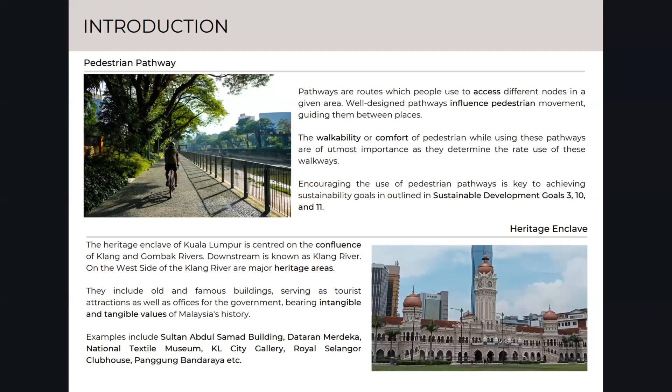These are actually quite important places because they have all these tangible and intangible values of Malaysian history. So these are quite important places in Malaysian history.

As part of the research, the problem identified is that despite there being designated paths through all these heritage enclaves, a lot of them remain unutilized, underutilized. Most of them have kind of their own subzone, their own sub-district. Each building will have its own standalone pathway, and crossing from one pathway to another isn't really convenient, and it's not very clear sometimes.

So people tend to especially avoid this part of the city, this side of the Klang River, preferring to visit the more busy sides where it's easier to navigate, like Petaling Street, Central Market, and Kasturi Walk. So during the day this site would be left a bit neglected, despite having all these historical and cultural values attached to it.

So the aim of this research is to establish the factors that define a comfortable pathway for pedestrian use within the heritage enclave, and then proposing design strategies on the existing pathways to encourage public use.

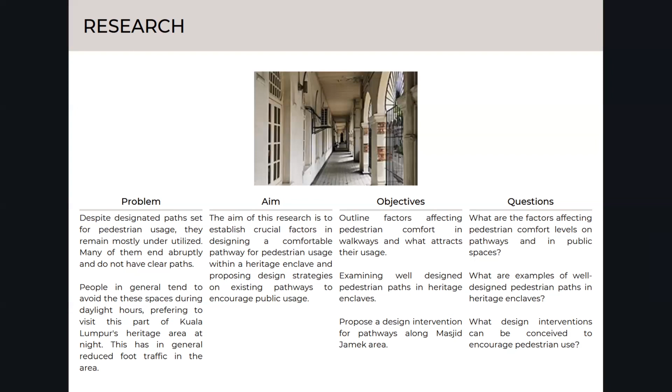The questions formulated, that act as a framework to help achieve these objectives, are: what are the factors affecting pedestrian comfort levels on pathways and in public spaces? What are examples of well-designed pedestrian paths, and what design interventions can be conceived to encourage pedestrian use?

Moving on to the literature review, the concept of heritage enclaves. Heritage is what societies, what people have left behind over the years. Generally heritage consists of tangible culture, intangible, and natural heritage. They're seen as very important parts of a town, a city, a place, a district, a zone - anything. Heritage is something important, tied to that particular place's history and identity.

The other concept is an enclave or a district - it's like a medium to large part of the urban fabric. Basically an enclave or a district, you walk in and experience it from the inside. From the outside, you pass by and may not really know what is going on, but when you walk in and start seeing particular programs and a particular design style, then you know you're in a...

historical district, let's say, or market district. Let's say you're in Petaling Street area or Central Market area - those would be market districts. You pass through Bukit Bintang, you would know that district or enclave is a business district or finance enclave sort of thing.

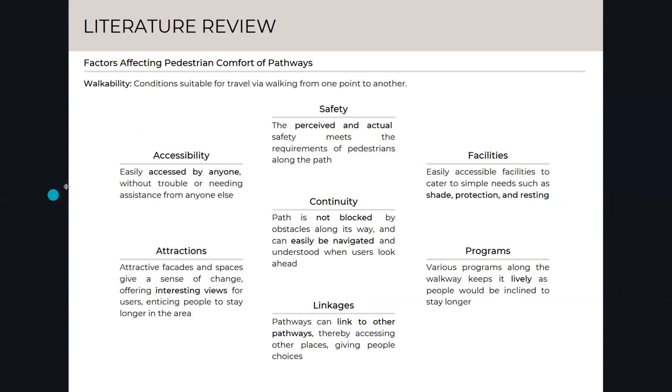A side-by-side analysis using the previously stated literature review, all these factors will be plugged into each of these case studies, and they will be compared and contrasted. Then from there, a proposed design intervention for Malaysia for the site, especially the Sultan Abdul Samad building area, National Textile Museum, and Masjid Jamek, will be proposed based on studies and analysis of the case studies.

That is all for my part. Thank you.

So the first one will be the introduction. What is a multi-level walkway? The multi-level pedestrian walkway is an effective way to enhance pedestrian connectivity to buildings and urban structure. It can easily connect pedestrians to enclosed buildings and improve city accessibility. Multi-level pedestrian walkways can bring pedestrian friendliness to the city, and as a result, the multi-level walkway was transformed into a design that may improve pedestrian friendliness without compromising automobile advantage and creating comfortable public space for social activities in a fast, busy city center.

So the next one will be the problem statement. Multi-level pedestrian walkways are exposed to environmental factors that affect thermal comfort. The problem of needing long ramps and stairs for pedestrian accessibility may increase the cost of construction, and large city planning is required to connect city node point to every advantageous place.

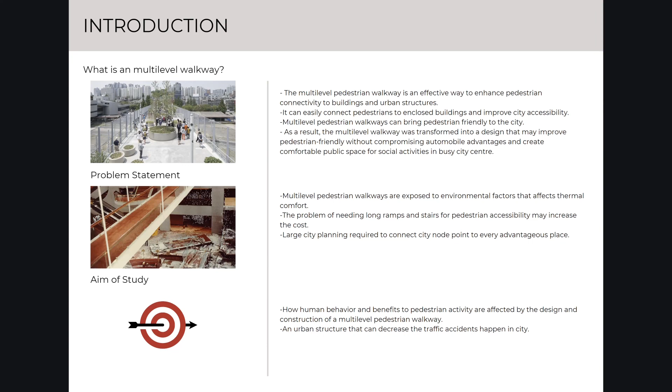The aim of this research study will be how human behavior and benefits to pedestrian activity are affected by the design and construction of a multi-level pedestrian walkway. The second aim will be urban structure that can decrease traffic accidents happening in the city.

Then the next one will be the literature review. The first subtopic will be the benefit of multi-level pedestrian walkway. Pedestrian infrastructure is essential for both development and public safety. Elevated walkways can improve the safety and health of pedestrians and other road users.

The second subtopic will be forming a lively, healthy, and sustainable city. Overdeveloped urban areas, urban design, and city planning have decreased city pedestrian walkability. The city is a concrete jungle of parked and moving cars, and as a result of municipal development, the city square, which can be utilized as a place for people to run, rest, and relax, is becoming less active.

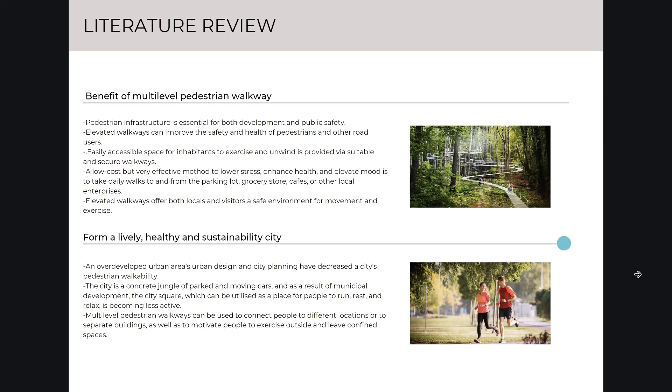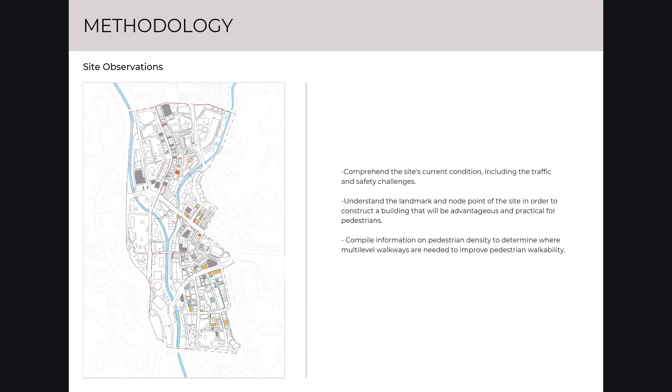So the next topic will be the methodology of site observation. Comprehend the site's current condition, including traffic and safety challenges. Then understand the landmarks and node points of the site in order to construct a building that will be advantageous and practical for pedestrians. The last one will be compile information on pedestrian density to determine where multi-level walkways are needed to improve pedestrian walkability.

Then the next will be the case study. The first case study will be the High Line in New York, on Manhattan's West Side. There's an elevated freight train line that has been converted into a public park called the High Line.

To adapt to the changing needs of the urban surrounding, the new spaces will provide greening opportunities, alternative transportation options, and social advantages.

Then the second case study will be the Skywalk system in Hong Kong. The Skywalk system has been effectively deployed in Hong Kong's residential districts, reducing the traffic-pedestrian friction associated with high density living, while helping to encourage the general public to use public transportation because they are connected into a trunk and feeder transportation network.

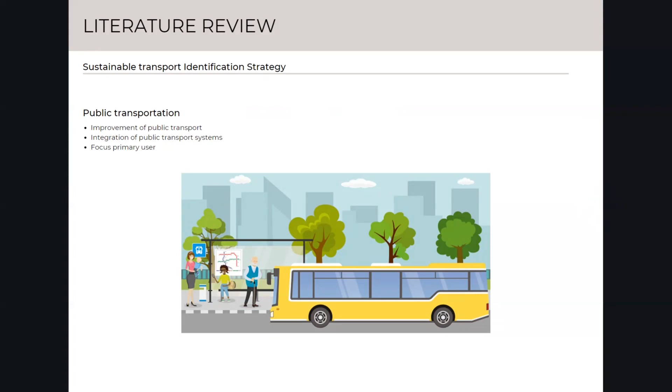So for the next one is public transportation. Mainly it is to improve the public transportation, the integration of public transportation systems, and also focus on the primary user.

So for the methodology, the case study I found out is in Chicago, USA. They mainly use low carbon mobility, using the bicycle as the main transportation throughout the city. They have built a robust network of bicycle infrastructure that is safe and comfortable for the user.

So for the next case study, Boston in USA. They generate a hexagonal tessellation of site equal to 1 mile, which is generally the distance an average person can walk from one node to another.

So the last one is the Walworth Road in London, whose strategy is a town center densely populated with people, almost all within a 10-minute walk of this Walworth Road as it junctions to another village center.

So for this site observation, on how I performed my research and analysis: first is to indicate the type of transportation issue on the site, then to understand the surroundings of the site and utilize a type of sustainable transport strategy, and lastly to mainly use good circulation of bicycle infrastructure, as bicycle infrastructure can massively decrease the air pollution rate and solve various transportation issues.

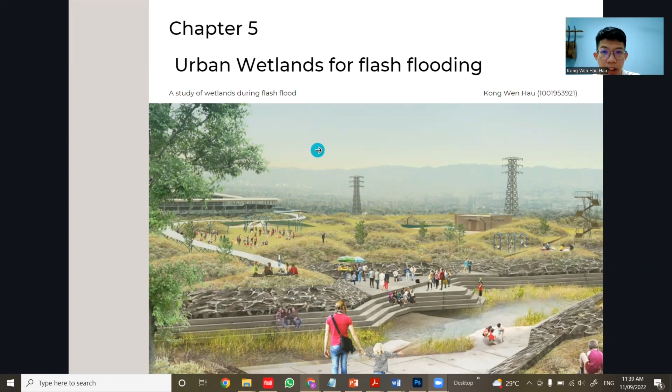So what is urban wetland? Urban wetland is a catch-all phrase encompassing water bodies such as lakes, rivers, swamps, marshes, wet grasslands, and peatlands that are continuously or seasonally saturated with water. Over the last century, two-thirds of the world's wetlands have been destroyed due to land use change and urban growth. Wetlands in Europe have dramatically dropped in quantity and quality, with many contaminated at an alarming rate.

Meanwhile, flood walls and drainage systems are commonly used to manage flood risk. Researchers believe that adding additional wetlands into the urban landscape might be successful. Urban wetlands should be designed in such a way that they account for the possibility that water running into them from the urban surroundings is more polluted than in a natural environment.

Moving on to the problem statement. Flash flooding has been a concern in Malaysia for a long time, and it has now become a critical issue. Although public and political awareness of wetland assets is growing, sectoral structure and responsibilities for wetland management are still lacking. These are the current issues we are facing, and there's no formal guideline for managing wetlands in the context of local watershed plans.

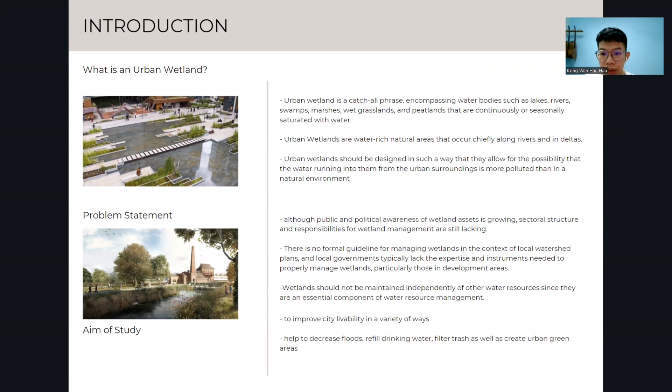Local governments typically lack the expertise and instruments needed to properly manage wetlands, particularly those in development areas. Wetlands should not be maintained independently of other water resources since they are an essential component of water resource management. The aim of this study is to improve city livability in a variety of ways, helping to decrease floods, refill drinking water, filter trash, as well as create urban green spaces.

Moving on to the literature review. The article I have chosen is Urban Wetlands: A Review on Ecological and Cultural Values. The topics covered are divided into three: natural and constructed wetlands, urban wetlands and urban sustainability, as well as urban wetlands and recreational values.

The first one is natural and constructed wetlands. Natural wetlands include rivers, lakes and their floodplains, swamps, estuaries, peatlands, tidal flats, coral reefs, and mangroves. On the other side, constructed wetlands include canals, drains, reservoirs, artificial lakes, fish and shrimp farming ponds, rice fields, and stormwater.

Urban wetlands not only provide ecological and recreational amenities in cities, but also enhance water quality through natural water filtration and climate regulation. One thing I forgot to mention is that urban wetlands are characterized as either natural or man-made.

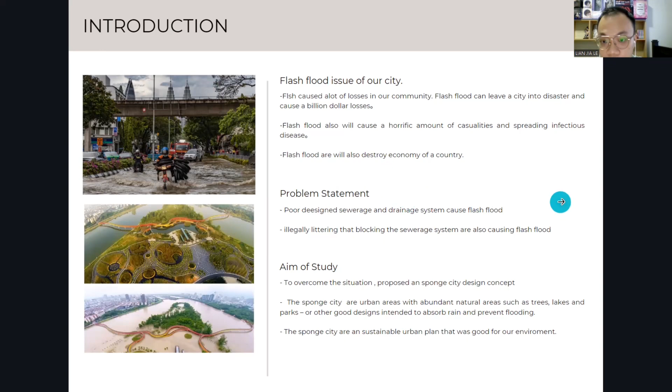Moving forward, which is the literature review. So the advantages and benefits of the sponge city are more clean water for the city because it replenishes groundwater, and thus greater accessibility to water resources for the city. This also entails greater water self-sufficiency, which allows cities to increase reliance on water sources from within their boundaries, and cleaner groundwater due to increased volume of naturally filtered stormwater.

Reduction in flood risk as the city offers more permeable spaces for the natural retention and percolation of water. Lower burden on drainage systems, water treatment plants, artificial channels, and natural streams.

They also provide a greener, healthier, and more enjoyable urban space compared to a concrete forest, which is what we're living in right now. A greener urban space can also improve our quality of life drastically compared to what we're facing now, and create a more pleasant landscape, aesthetic, and recreation areas that are enjoyable and attract people. They also can enrich biodiversity around green open spaces, wetlands, open urban gardens, and green rooftops.

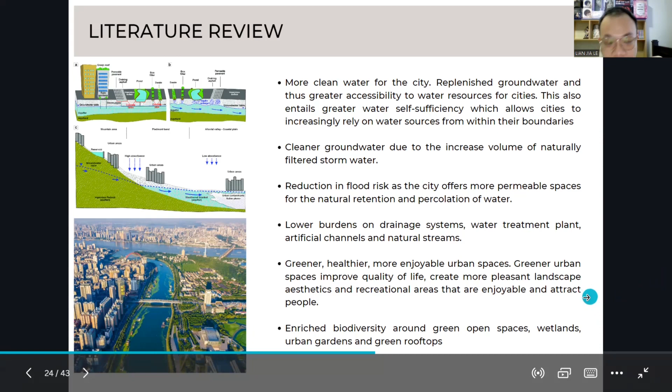So this is one of my case studies applied in China: Shenzhen Sponge City. Firstly, the concept was established by the China government. Then Qin, one of the major architects, participated in this project.

So by applying this method, China has been using a very practical and yet very aesthetic way. It's a win-win solution to solve the flash flood problem.

On smaller scales, there are also several options. Permeable pavement can be used on roadways, sidewalks, and pathways to allow water to infiltrate the ground, rather than washing off to the local stormwater system. So practicing these kinds of things is very effective in solving the flash flood problem.

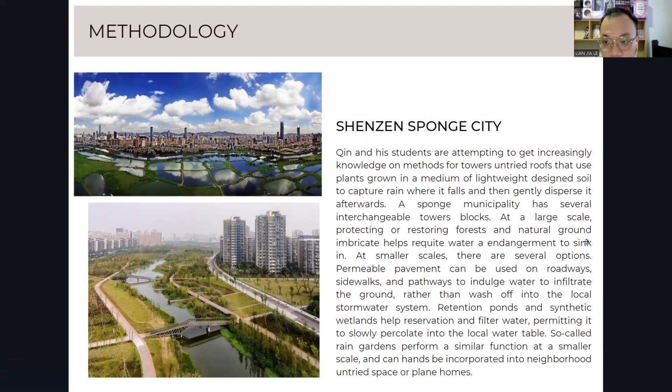The reason for the Masjid Jamek flood was mainly because the city was always developing, causing rapid growth of population, but they didn't have a proper sewerage and drainage system to cope with the current situation. That's why it led to the flood crisis. Also, the drainage and sewerage system as designed is unable to handle the volume of garbage produced by the inhabitants of Kuala Lumpur metropolis. Due to this, the constant overload of drainage during rainy periods will increase the risk of flooding.

Illegal dumping and poor waste management, which clog the drainage and sewerage system, are two more unavoidable factors contributing to flash floods. So, in short, to overcome this situation and avoid it happening again, sponge cities are a very practical way, as proven by China, which solved the flash flood problem by separating the tasks of the drainage system, not relying too much on it. This is to avoid the chances of our city getting flooded and to avoid more losses. Thank you, sir and miss. That will be all of my presentation.

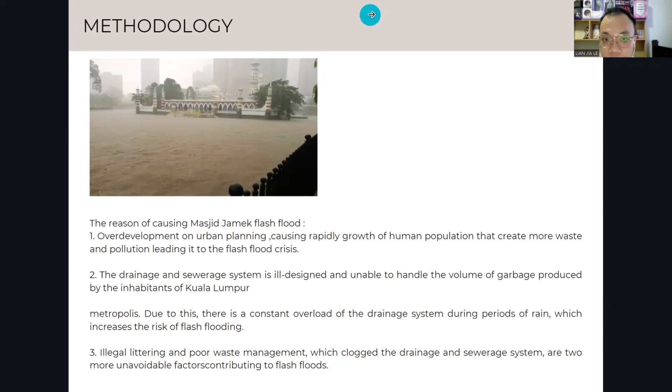Hi, Miss Intan and Professor Nangkula. My name is Vincent, and I will be presenting my part of this assignment, which is an evacuation park for people during flash flood incidents.

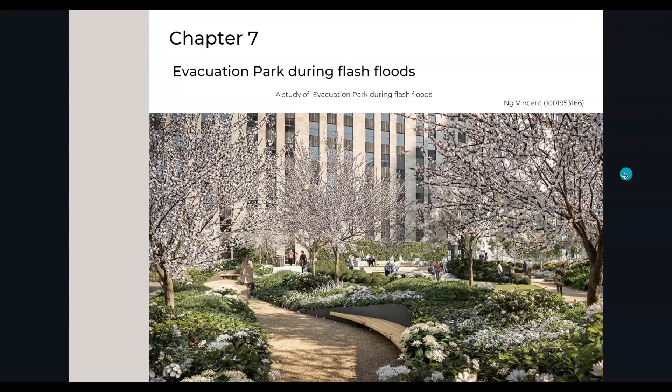Flash floods are the most frequent and disruptive hydrometeorological phenomenon that cities in Malaysia encounter. They are mostly caused by seasonal monsoon rain, which causes insufficient drainage systems to channel water flow properly. The overflow of rivers is also a major cause of flash floods in the city. Looking back at recent history, it appears the problem has gotten worse rather than better.

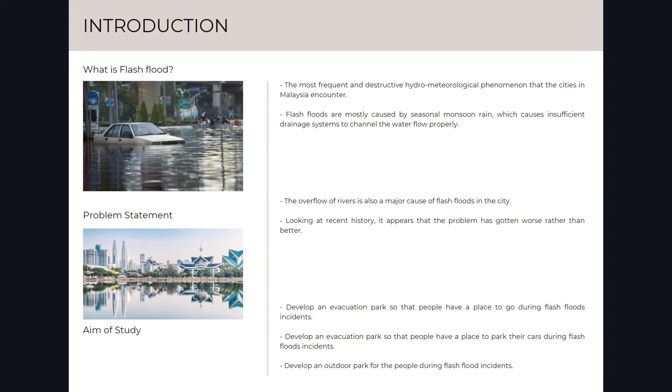The aim and objectives are to develop an evacuation park so that people have a safe place to go, a safe place to park their cars, and an outdoor park for people during flash flood incidents. The paper includes a review of the literature as well as discussions about the built environment, flooding, disaster risk management, and resiliency and sustainability theory.

The goal of this paper is to review relevant literature on reducing the impacts of flooding on the built environment in Malaysia, while also describing potential improvements and current measures to deal with the aftermath of flooding. The paper is important in three ways: reducing flood impacts by raising knowledge, providing responsibility measures in flood reduction from various perspectives, and planning ways to mitigate the effects of future flooding threats.

In conclusion, the key findings of the paper are that through knowledge application, the practice of reducing flooding impacts could be improved. Flooding management should be carried out earlier before flooding occurs, but also later during the event, and disaster management should be carried out later in the event. Management plans must be prepared to deal with any uncertainties that may arise.

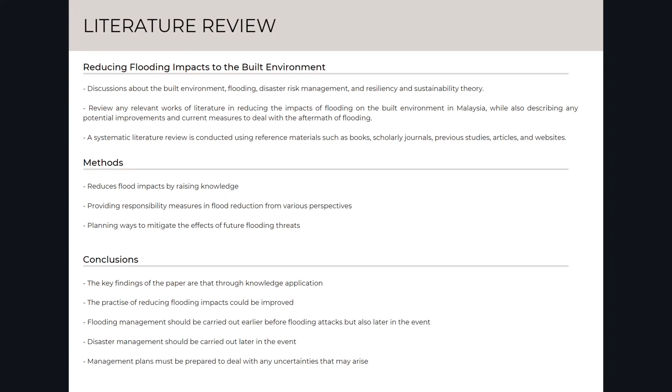The first case study would be the Melbourne Skyfarm. It features a program to provide some demands to the people around the site. The next case study would be the Tishman Speyer's Rooftop Park. It features dense landscaping throughout, meandering pathways, pavilions, seating, and some passive recreation areas.

The last case study would be Japan's Namba Parks. It features an 8-level rooftop garden and will act as an evacuation shelter for people. That's all for my part. Thank you for listening.

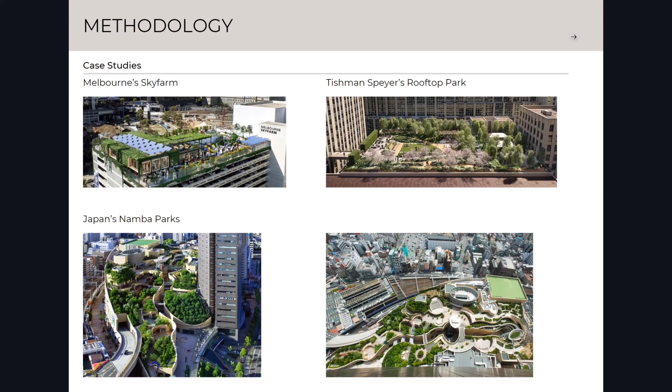Hi, good morning, Miss Intan and Professor Nangkula. My name is Chen Wei Kin, and today I would like to talk about my chapter, Biophilic Architecture for Urban Heat Island Effect. It's the study of biophilia in an urban setting.

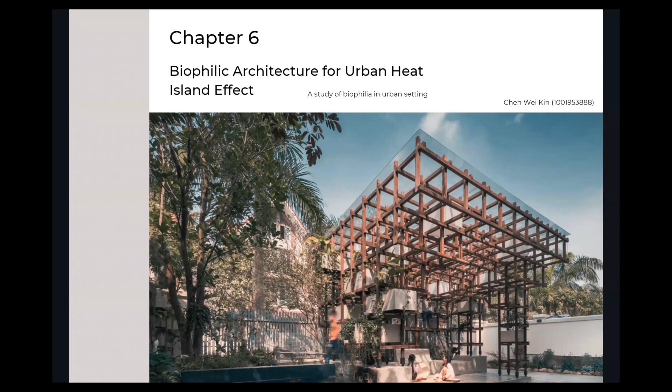What is biophilia? Biophilia is understood as the love of life from ancient Greek mythology, where it was first introduced as an expertise in social psychology by a psychologist named Erich Fromm, who states the idea of biophilia is understood as love of life from ancient Greek.

The hypothesis suggests that humans possess an innate tendency to seek connection with nature and other forms of life, such as our natural surroundings and environment, where design takes place to attract humans towards the beauty of nature and greenery as part of an architectural solution strategy in everyday life. It is the belief of creating spaces consisting of natural materials such as plants, stones, and water, where the natural shape of organic formation also brings psychological comfort and emotional benefit to users as it releases serotonin, a psychological hormone.

The problem statement is that the urban heat island effect is currently facing Kuala Lumpur, which is our site in Unit C, as the urban heat island effect is defined as the temperature of the city getting higher than usual, and also higher than the rural regions of the country.

These problems are actually caused by pavement structure, buildings, and elements that absorb and recollect heat and emit heat radiation, where materials such as concrete, asphalt, and tar are involved.

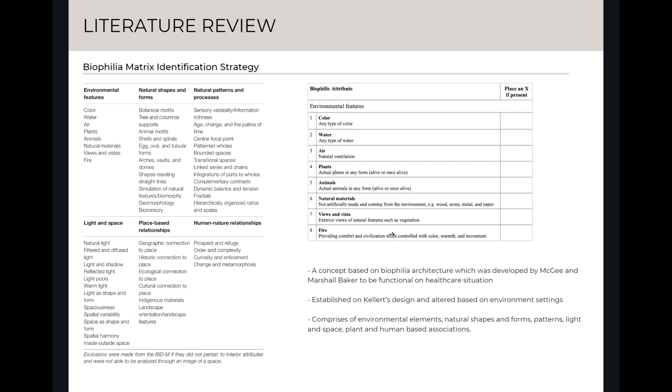Vertical greenery system is defined as the greenery incorporated into building facades in urban development, such as wall, roof, and balcony. It's used to integrate with buildings to lower the temperature of the exterior surroundings and cool the interior spaces of the building. It has a cooling effect as a vertical greenery wall system.

It's beneficial in terms of decreasing consumed energy, where vertical greenery wall systems are possible to signify ecological engineering technology, known as reconciliation ecology, where low temperature and great humidity attributes were discovered between the wall structure and green facade. This means green facade can decrease the mean radiant temperature values by having 50% green coverage and a shading coefficient of 0.041 to reduce the transfer of thermal heat value on the glass surface of the building.

So there are also potential advantages of vertical greenery systems in tropical climate countries such as Malaysia, and this can also reduce the consumption of energy in terms of cooling the building.

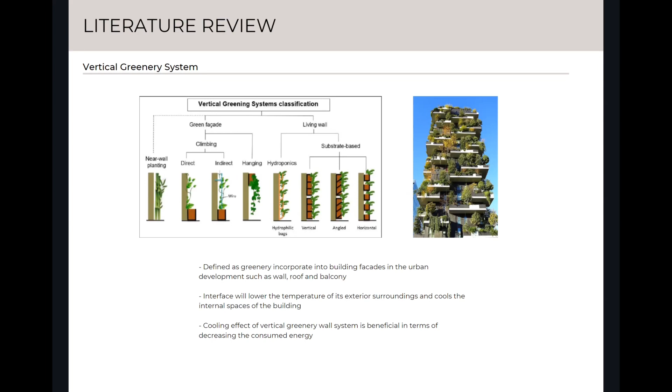The case studies I've covered are two, which are biophilic architecture and vertical greenery system. For biophilic architecture, the case studies I covered for this study are Greenacre Park in New York City and Jewel Changi Airport in Singapore, where these case studies are analyzed based on the study of how biophilic architecture reduces energy consumption in an urban setting and spaces.

And how they are designed based on the intention of use of natural environment elements, where these were selected based on locations of urban settings with experience of urban heat island effect and surrounded with tall buildings and structures. This is also to understand the deeper study of characteristics in biophilic architecture in urban structures.

For vertical greenery system, the selected case studies are One Central Park in Sydney and JW Marriott Jeju Resort and Spa in Korea, based on an analysis of how vertical greenery system can mitigate the surrounding temperature and help with the cooling effect in the spaces of the building, studied based on the programs, spaces, and assessment of how it mitigates urban heat effect in the urban surroundings.

Lastly, the methodology will be site observation, where the selected site is based on the Unit C site selection, Jalan Tun Perak, in order to understand the process of distinguishing and noting context of the surroundings and relevant information. This site observation helps us understand the surroundings of the site and create biophilic strategies which can be applicable in this urban setting.

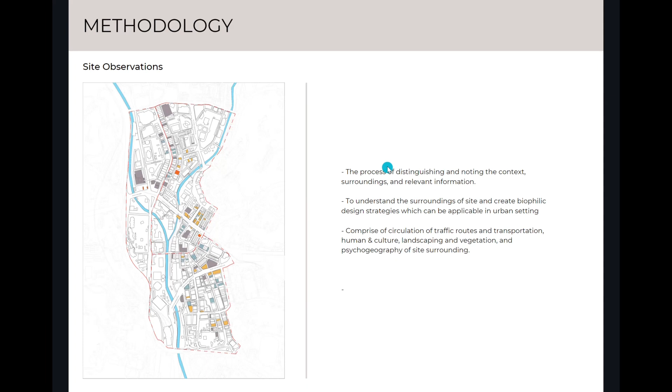Lastly, the environment of Jalan Tun Perak is observed to be filled with skyscrapers, tall corporate buildings, as well as road surfaces and construction materials which emit heat radiation to the surrounding. Therefore, site observation is quite important in order for us to develop a better strategy for this biophilic design. Thank you.

So for chapter 9, I'll start with the title, which is Urban Park to Improve Quality of Life in Malaysia. So it is a study of how urban settings and considerations would improve one's life in the city.

In the city where they are full of skyscrapers and offices, greenery is somewhat a buffer or place where they could temporarily leave the hectic lifestyle. The presence of parks in the urban setting is not only for human well-being, but at the same time is important for cities' well-being as well.

However, there are some problem statements that come up in urban park settings. Based on different culture and diversity, the design phase of an urban park is different, so differences in Malaysian attitudes to park usage could actually affect a park's success and failure. So designers should always do thorough research based on the context, locations, and cultures before designing the urban park. Other than that, there are known problems highlighted in some Malaysian urban parks, such as seriously damaged interior greening, low quality of service, and old or missing public facilities.

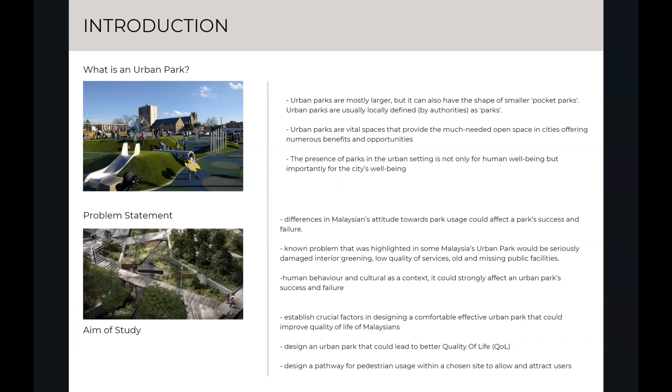Into the literature review, based on my research, it is quite an interesting concept from M. Powell Lawton that the quality of life should and could be integrated into urban design or urban parks. The four main components of quality of life are behavioral competencies, environmental quality, psychological well-being, and perceived quality of life. They all refer to more specific aspects, but all of these are psychology-based thinking that could be integrated into urban park design considerations in order to achieve better lifestyles for residents and a more successful urban park.

For the methodology, I chose 2 case studies in Malaysia to have a better grasp of the context and culture. Through that medium, the method of data collection and research would be the quantitative research method, which is surveys. The purpose of these surveys is to identify the benefit of participation in recreational activities in the urban park, making sure that the quality of life through the application of these considerations could in fact achieve the objective of improving health status and others.